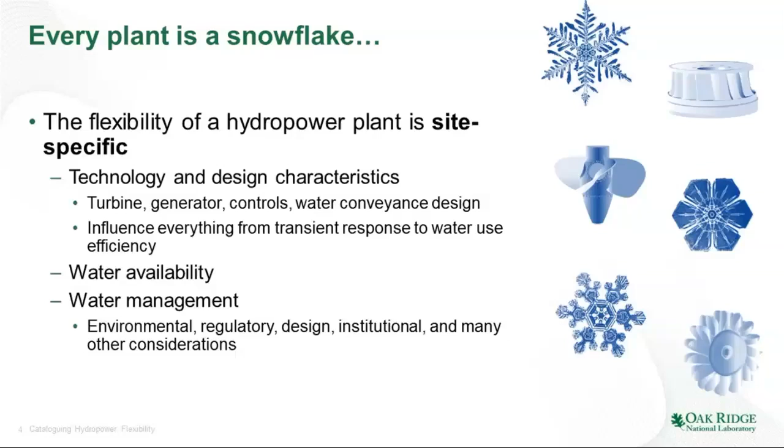And so to talk about that, I want to introduce this concept of timescales as drivers of hydropower flexibility. I've taken a chart here from the Department of Energy's Quadrennial Energy Review from last year. I think there's lots of different charts like this that map out what's happening in the power system at different timescales. But this is a useful starting point, and I've overlaid here at the bottom different types of drivers in a hydropower context.

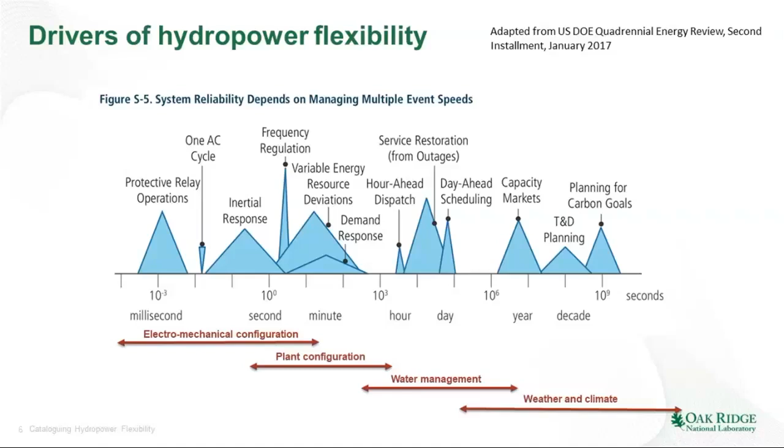And so when you're talking about the things that happen without human control, whether it's response to faults or automated controls, that's completely dependent on how you design machines. When you move out to longer timescales, even within a day, within an hour, that depends on how you configure your plant, and then the real long-term flexibility, how you move energy in large blocks to meet demand and prices and needs comes through water management. Overlaid on that, spanning your daily timescales all the way out to years and decades, is changes in weather and changes in climate. And so it's in this extremely complex and broad space that we have to quantify what we can and understand what we can to help support DOE in executing an impactful R&D strategy.

So, let's see here. First thing I want to highlight is that at a macro scale, it's really water that drives capabilities.

All of these, what you're seeing on the top row here for the different regions of the U.S. is hydropower utilization. We've taken the scale off just so it's relative to that region. The second row is pumped storage utilization relative to that region, and the bottom row is electricity consumption in that region as well. And so at this really bulk scale using monthly aggregated data, we're able to see a couple clear things. One is that when you have power, when you have water as fuel available to generate power with hydropower dams, it doesn't always line up with at least the highest times of electricity consumption.

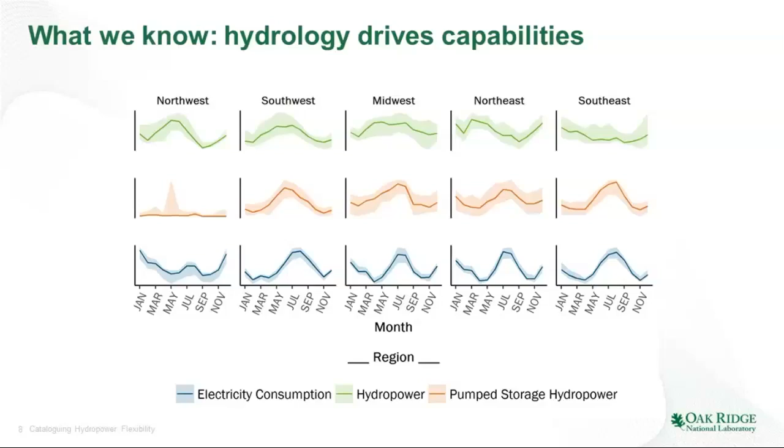And even in the context of those monthly and energy type constraints from water availability, the hydropower fleet in aggregate is quite flexible. On the left-hand side of this slide, I have a chart here from our market report that shows how hydropower, the light blue line towards the bottom, tracks net load within the California ISO. So you have some pump storage plants here, you have lots of small hydro, you have some bigger hydro as well, but in aggregate, the fleet is able to track these net load deviations where you have significant amounts of solar. Everyone's, I think, pretty familiar with the duck curve.

But what's interesting is you sort of see these seasonal variations as well, where if you look in spring, there's a floor of about 2 gigawatt hours on an hourly basis of hydropower minimum that comes in, and that drops during the summer and fall, and you lose some flexibility as well, simply because you have less water and you have competing needs for that water.

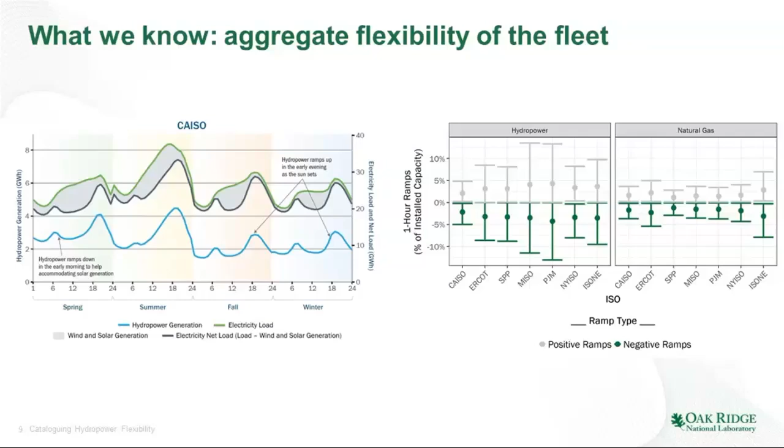But still in aggregate, you can see over on the right-hand side, we have the hourly observed ramping behavior of hydropower compared to in aggregate natural gas for all of the ISOs in the U.S. And you have your medians and your 90th and 10th percentiles here in the chart. But hydropower ramps up more significantly and down more significantly than the gas fleet in aggregate in each of these ISOs. That's partly because you have dispatchability of pump storage, and partly because you still have storage and flexibility capability even within smaller plants and those with other water use constraints.

We're able to observe at national scale differences in operational patterns. The larger your unit is, probably the more valuable it is to the power system, and the more it's used in a situational context. So what you're looking at is for different sizes of units, less than 10 megawatts, 10 to 100, those over 100 megawatts, and then pumped storage units, how often they're started on average in a given year. So our small hydro obviously doesn't start all that much.

I think the typical small hydro plant in the median here is started once every month. They run fairly continuously. As your units get larger, you're talking still that once a month, but there's some that are once a week. By the time you're at your largest units, typically they're starting once a week, which means they're stopping and responding to differing demands on the power system. And then everyone's most flexible resource, pumped storage, starting multiple times per day. And so it's these differential capabilities that are driving flexibility and value in a lot of these markets.

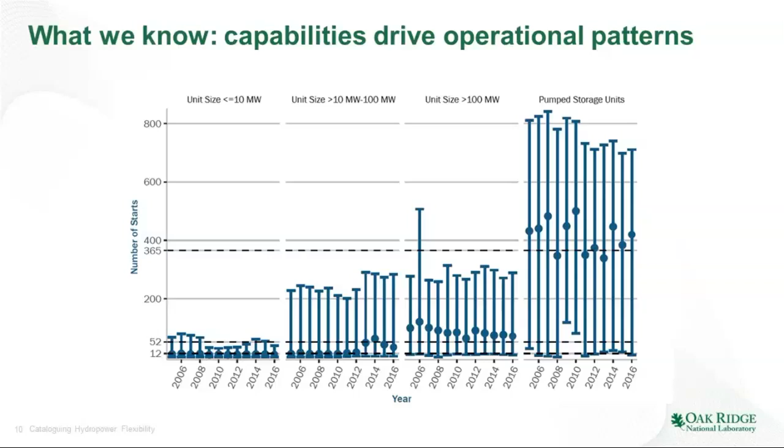And in terms of value itself, we're able to track differences by region, and not surprisingly, for those of you who are familiar with relative electricity prices, a megawatt hour of hydropower is pretty, on average, more valuable than the average megawatt hour in a market.

But even though we talk at length about ancillary services and other values, it's really energy. And when I say energy, I mean the price of natural gas that drives the relative price of hydro. So you see these annual trends in each of the regions, but it correlates very strongly to the price of natural gas, simply because that's what's setting marginal prices, whether it's energy or ancillary services.

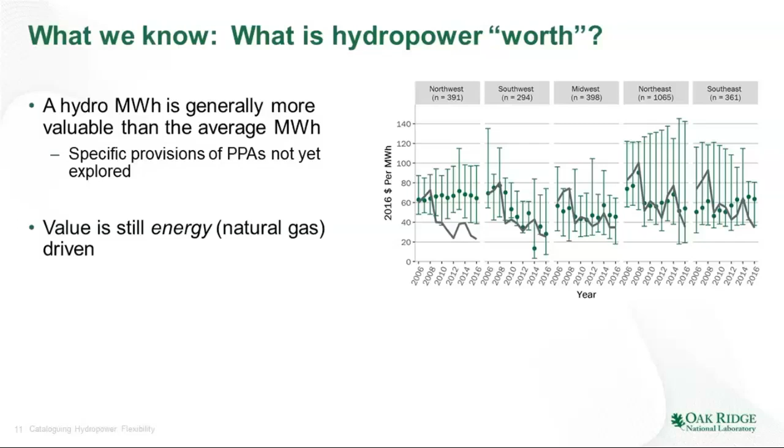But even within all this, we can take little glimpses of the future. As part of our market report, we work with PG&E to take a look in more depth at the Helms Plant.

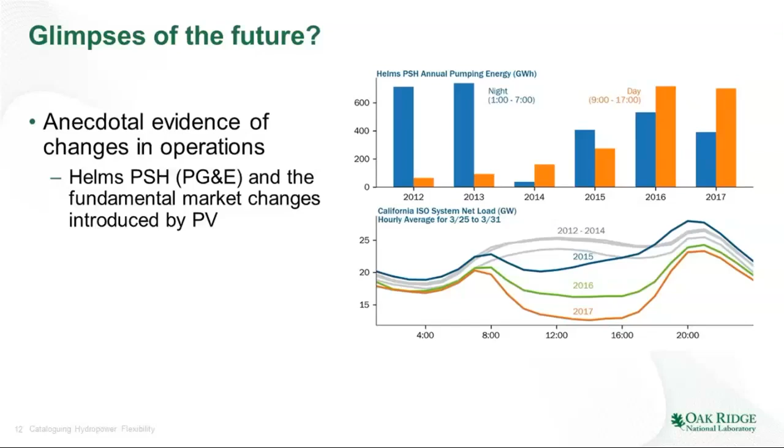Obviously in response to increasing penetrations of solar, you can see in this top chart here that their pump storage plant has increasingly been pumping throughout the day, in a sort of pronounced operational shift from traditional pump storage day-night arbitrage operations. That certainly is a glimpse of, I would even say, the present for PG&E, but as the power system evolves in the rest of the country, we may see similar demands on other projects as well.

Within all of this, we have increasing flexibility, we have our needs for flexibility, and we're also seeing rising costs. I don't want to say that's the cause—that would be the holy grail of identification if we could—but all we do know is that the cost to operate and maintain hydropower of all stripes is increasing at rates in excess of inflation, and the availability of these projects is declining as well.

So as we think about hydropower as an existing source of flexibility, the fact that its costs are increasing and availability is decreasing is probably not a good thing at all, and begs for solutions.

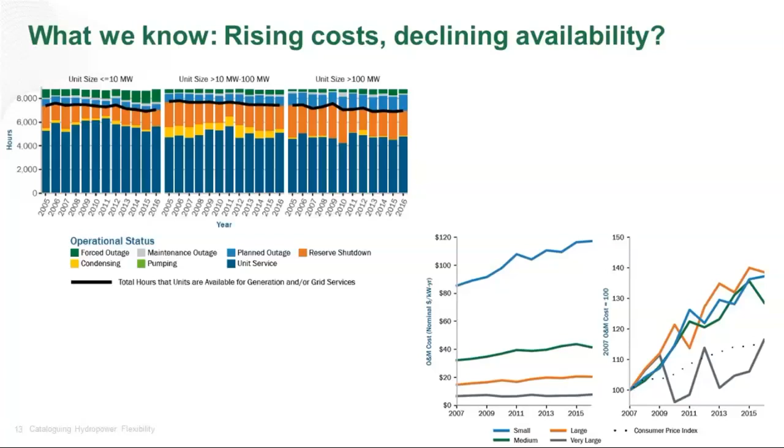So I think what you've noticed is that we talk a lot about flexibility, but what you've seen out of the market report is at a highly aggregated scale. And so when we do national analyses like this, we have limited visibility into the rest of what's happening in the power system, some of the key technical capabilities of hydropower, and what we're really only seeing is the influence in the aggregate of certain water management practices and the weather and climate aspects.

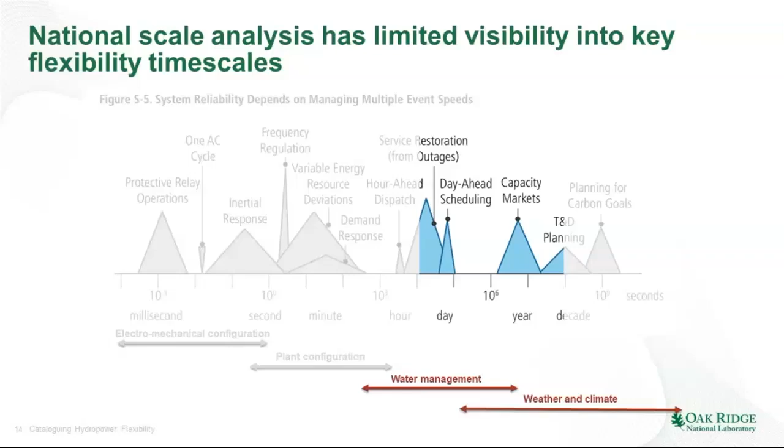Even then, that's kind of generous. We can do what we can at national scale, we can do what we can when aggregating through time and across spatial scales, but to make better informed decisions, we really need better data.

And so that was the motivation here for DOE's new Hydropower Value Study project—can we do better to inform the R&D agenda, not just to track industry trends, but can we actually learn things about operations, learn things about plant configurations that allows DOE to make informed investments.

This is a multi-lab effort led by PNNL, a colleague of Nathalie and myself, Abhishek Somani, is leading that project. And it's, just broadly, can we learn from case studies, and can we do more detailed, more focused data collection to answer these questions?

The project itself is split up into 3 different core tasks. The first is a landscape analysis. This is, in general, a more granular look about how hydropower is being operated across the country, why it operates the way it does, how it's valued, and there's a really interesting component of this. I'm not going to talk about it here, but if you want to know more, follow up.

On how do you look at the value and can you monetize the value of certain streams that we hear from hydropower owners—at least they're providing, but they're not being compensated for. And so inertia is the primary focus there.

Building from where hydropower is and is operated today, we're looking at future value drivers as well. That's how the power system evolves, what possible paths are there, and what sort of demands and what sort of value is going to be placed on flexibility for hydropower in the future.

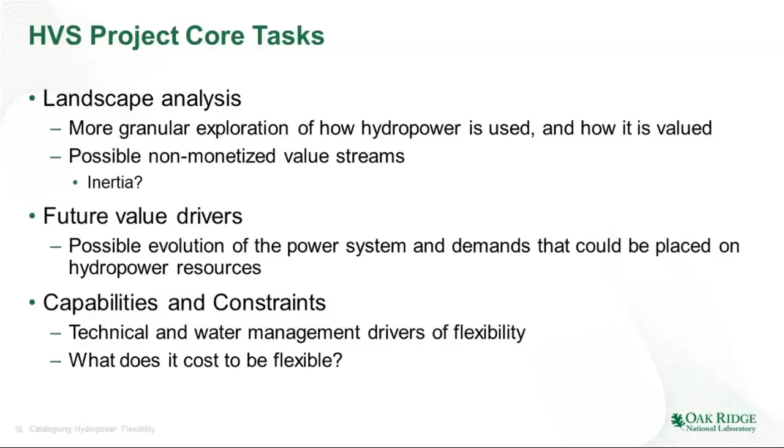Can we drill down within a project, within a unit, and identify specific types of configurations that increase or decrease flexibility? At that point, you can start making decisions about whether you can, at a cost, become more flexible, and can we quantify that? I'll give you a few examples from this capabilities and constraints piece, but hydropower is its own challenge.

So we're working from plant and unit scale databases. These are organizations and types of information we are involved with utilities for and other contexts. There's electric utility cost group data stored in HydroAMP, and other centralized sources. Where it doesn't exist, we can try and make inferences, but we're still swimming uphill trying to identify each and every one of these snowflakes to the extent we can.

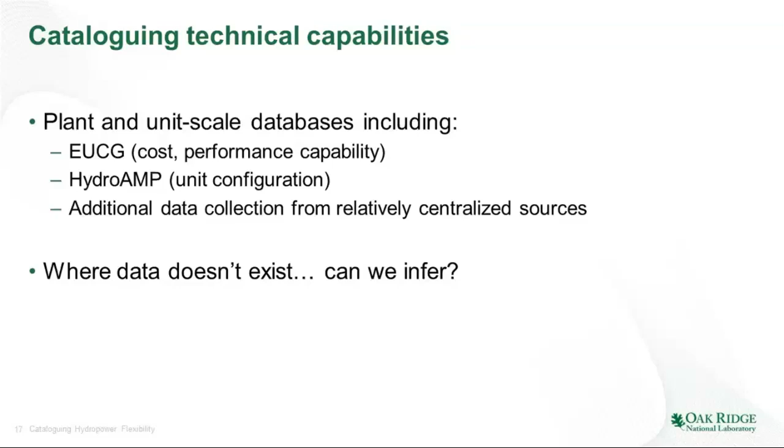So just some observations from what we found. To the extent we can quantify flexibility in the fleet, on the left-hand side I'm presenting data that comes out of the Energy Information Administration's new requirements in their standard data forms, showing that the vast majority of hydropower, over 80%, can cold start in less than 10 minutes. And when you think about that, it means it's ramping even faster. These are, I'll call them, conventional resources - very, very fast and flexible - and the vast majority of the remaining 20% starts within an hour due to various technical and plant constraints.

But different types of units are used very differently. There's different value drivers and different capabilities. In this right-hand chart, I'm presenting data from one of our utility partners, so it's obviously blinded here, but what you're seeing in terms of the height of these bars is the amount a unit moves on average within a day. I'll use this pump storage bar as an example.

This is a 100 megawatt unit. The scale you're looking at here is the number of megawatts it moves up and down in a day, in absolute terms. This pump storage plant is extremely flexible, and if it was starting and pumping once a day and stopped, that would be 2 times its capacity. But instead you're seeing nearly 50. These are units that are coming on and off, following load and incurring the associated wear and tear.

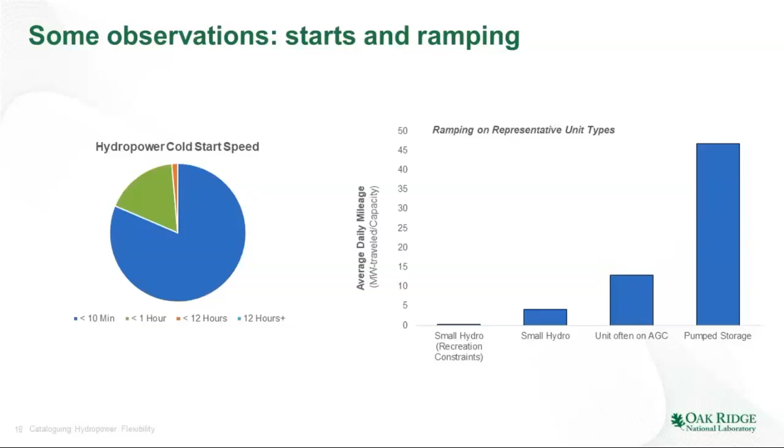Some other things we found by digging more deeply into how individual unit, plant, and site characteristics influence flexibility and capabilities for flexibility - on the right-hand side here is a succinct illustration that different types of hydropower, different configurations, different site characteristics, in this case, have fundamentally different inertia characteristics. What you're seeing is these blue X's are propeller type units - if you're familiar with hydropower, these are Kaplans or fixed blades - and your green units are Francis types.

The propeller types are lower head, so you have less pressure differential. That means for a given capacity here on the x-axis, you're going to have a bigger, heavier unit, and that unit's just going to have more inertia by the nature of its design. The characteristics of the fleet here, as an illustration, are going to have a profound amount of influence on how hydropower in aggregate is able to respond to a changing grid.

In addition to direct inertia, there are stability characteristics that also vary. Often when we're looking at new hydropower, we often think pump storage, and then there's decisions to be made there whether you have a fixed pump or a variable speed pump. Those come with certain technical capability trade-offs. Your fixed speed pump is going to be synchronous - it's going to have inertia, and if that's valuable in the system, you would almost prefer that.

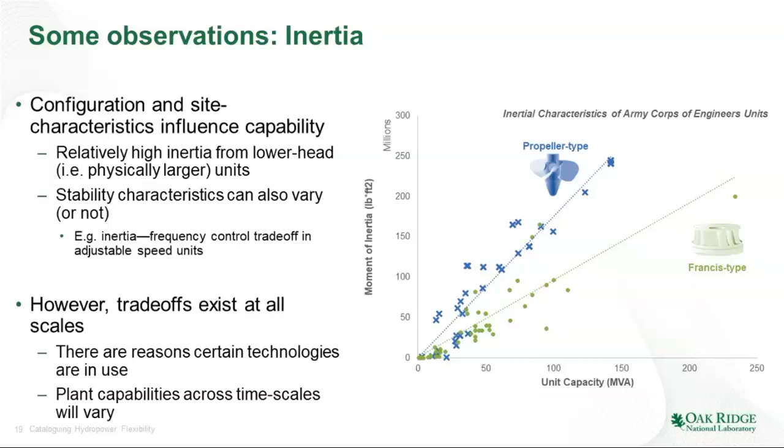But even beyond how you put a machine together, you have capabilities that vary across all time scales simply from how you manage water and what the other demands are on a project.

In general, that leaves us at a place where we have lots of information, we have lots of stories to tell, but we need to tie it together in a way that provides really good insight. I'd be curious to hear from you all if you have questions on what sort of things you'd like to know about the hydropower fleet and how we can communicate those.

In general, we need better information at the unit level. We were able to collect a lot of that, but at the plant level and certainly in water management, it's hard to look consistently across the fleet. There's even sort of an existential question of can you catalog in a coherent way water management practices for 2,000 hydropower plants?

In the absence of the capability to do that, though, case studies are really useful. We can take these complex interrelationships between equipment design, plant design, hydrology, and institutions and put them in context. So I'm going to turn over the presentation now to Nathalie to discuss how hydrological constraints influence flexibility, and she'll talk through that in concept and then give us some results from one of our case studies.

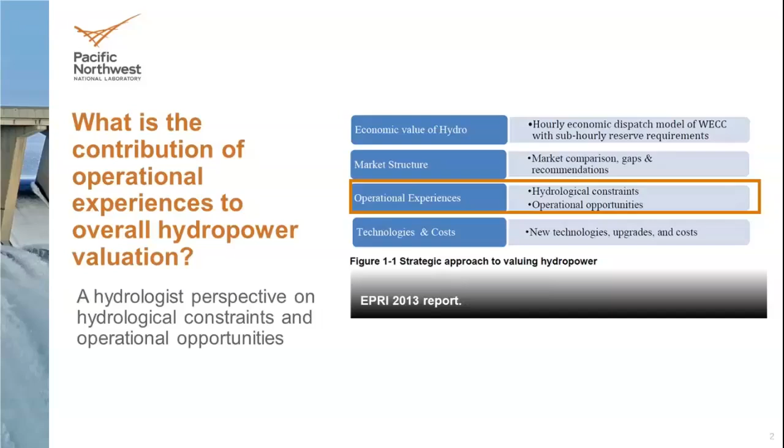The actual question we try to address is what is the contribution of operational experience to overall hydropower valuation? The way to value hydropower, we have multiple tasks to do this, and leveraging the EPRI report, there is the economic value, the market structure, the technology and cost, and here really following on this operational experience, like Patrick said, there are a couple of different snowflakes, and we want to understand how those snowflakes evolve. From a hydrologist perspective, it means that I'm looking at very different scales. So to give that hydrology perspective, I'm going to start back from a very large scale.

Just as a spoiler, there are fuel-specific opportunities, but they are being tuned up by flexibility requests from the power system.

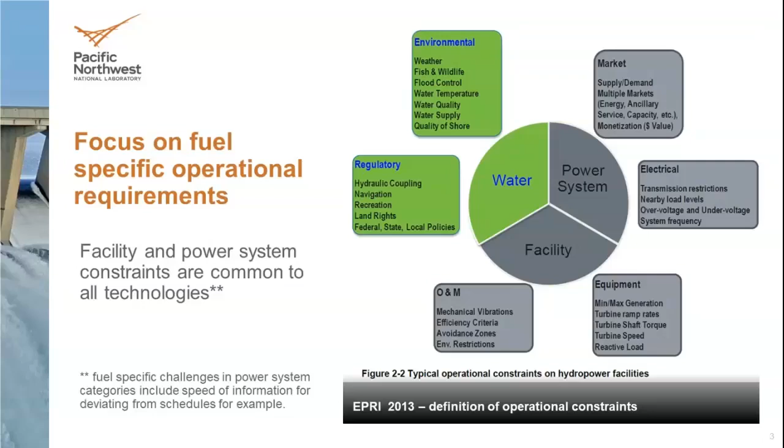What it means with respect to that fuel's characteristics is that water is free, it comes at no cost, and the transport by itself is also free. It's provided by the river system. And there is a huge storage that is also very economic because it's provided by snowpack and also by the storage within the river itself.

The capability that it provides is that, sure, it's variable. There is more or less precipitation depending on the seasons. Sometimes that's snowpack, and precipitation is not the same every year, so you have an interannual variability. Some people see that variability as a constraint, and I'm going to demonstrate how it's actually an opportunity.

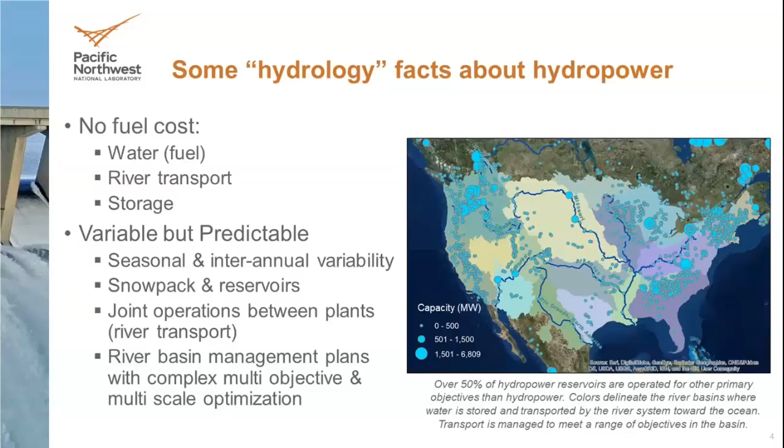What that provides as well is insight on what the operation will be and when the fuel is going to be available. I wanted to provide this so we can make the contrast with other technologies, in particular thermoelectric capacity. So how is hydropower used over the entire U.S.?

What we're going to look at is how each region is harnessing the hydrology and hydropower.

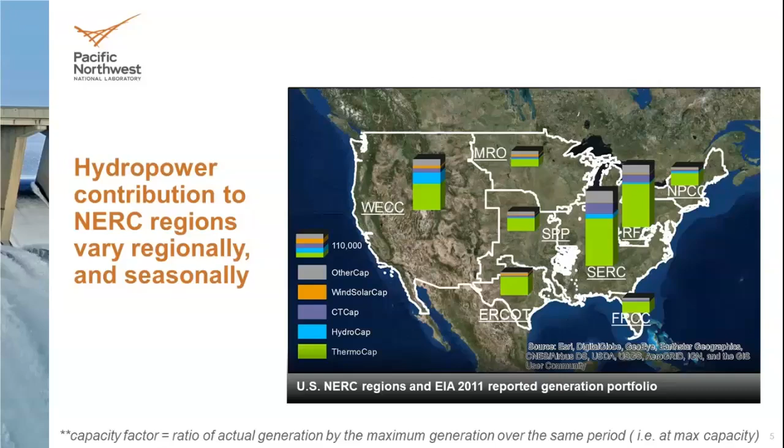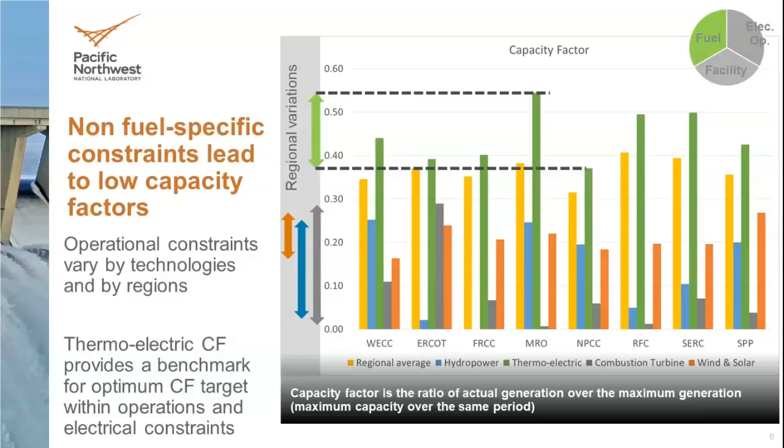That's the assumption for this presentation. That helps us quantify those hydrology constraints and opportunities.

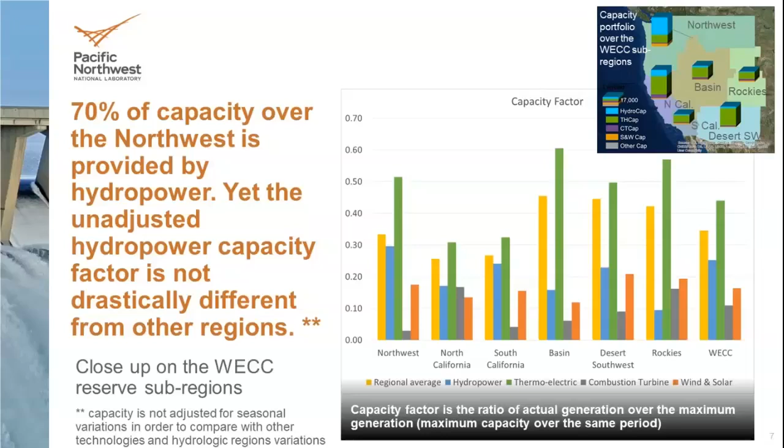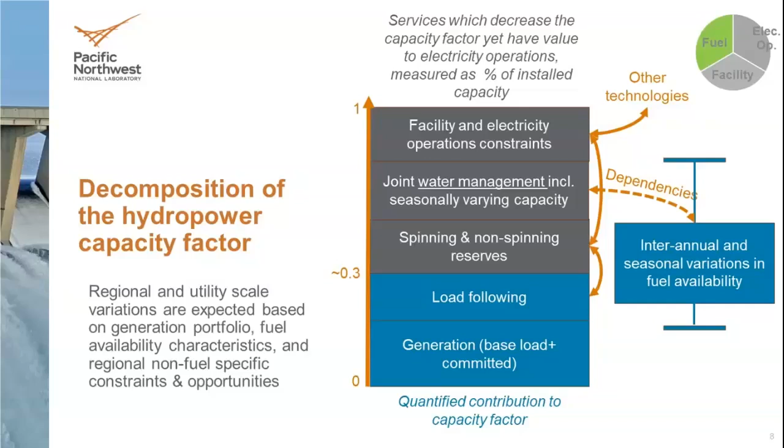What I'd like to demonstrate here is the role and contribution of interannual and seasonal variation in fuel availability. By fuel availability, I'm also including everything included in water management. Coming back to the Northwest, over the Pacific Northwest, combined seasonal and interannual variability in hydrologic conditions lead to large variations in hydropower capacity factor. We know it - question is how much?

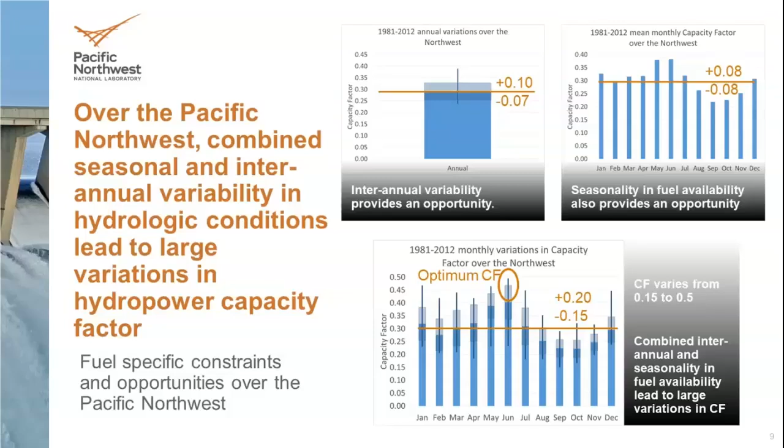The last point to show is that in terms of predictability, you really need to combine both the interannual variability and seasonality to understand how the capacity factor is impacted. When you compound the two events, seasonality and interannual variability, the variation in capacity factor goes to +20% to -15%. That is the variation that sometimes is seen as a challenge for coordinating power systems. And strangely, when you look at long-term planning, sometimes this variability is not well represented. I'm making this remark because it's going to impact how we value and understand hydrology constraints on hydropower.

So this was at the Northwest scale. The value of hydropower and how hydrology is impacting hydropower operations varies across scale. So I want to do a deep dive on a case study, which is the Chelan PUD. Chelan is located over the Northwest and consists of a storage project on a tributary of the Columbia River, and has two runs of the river that are downstream of Grand Coulee, and a set of very large storage projects in the US and Canada.

So the inflow into those projects is extremely regulated. It's hydropower only, and like many hydropower utilities, services are marketed for the entire project. That's important to know because water management can be pretty complex and is usually reserved for the river operators, and then they market the services as a whole to the grid. It means that water managers also ensure coordination between the plants for water management purposes and for the grid purpose as well.

On the right, you have the outflow from Rocky Reach for 3 years: a dry year, an average year, and a wet year. As you can see, the turquoise is the flow that's going to the turbine, and in salmon orange is what goes through the spill. The spill is necessary for downstream benefits such as flood control, water quality, and simply for dam safety. It's limited by storage. Across the entire US, only a couple of reservoirs can store the annual flow and have a perfect, very flat flow throughout the year.

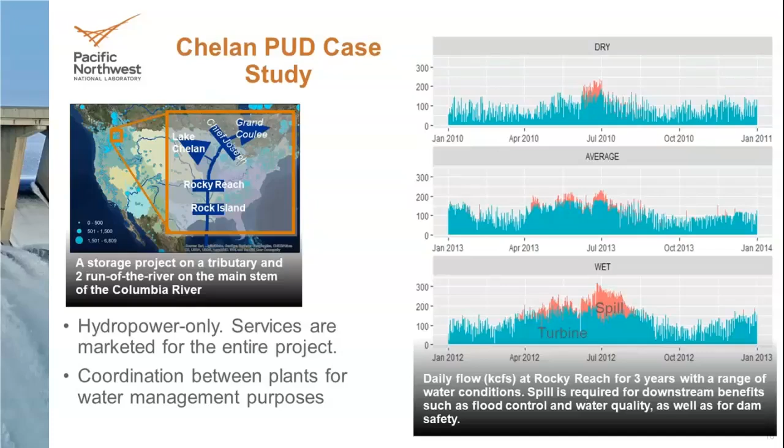Most reservoirs can only store about a couple months worth of flow. So the predictability of the fuel is about three months, and it varies from one dam to another. That's why there is some spill that is being handled by water management. And you can see that interannual variability is affecting that spill more than what goes through the turbine.

When you look at how operations are impacted, here we're looking at the capacity factor again for the entire Chelan project, for two periods: high flow and low flow. During the high flow period, this is when spills are occurring, and in blue there is the generation, and the capacity factor is much higher because it's a run-of-the-river reservoir.

So we're talking about a capacity factor of 75%. Even with high flow, there is a reserve that is not contributing to the capacity factor, which is about 15%, and this is sustained throughout the hours of the day. If you look at the maximum operational capacity and minimum generation, this is the flexibility that can be provided by the plant. There could be any change in operation within that range. We need to define for how long, but this flexibility is available. Given the power system requirements in the market, it's being used here as something pretty constant throughout the day.

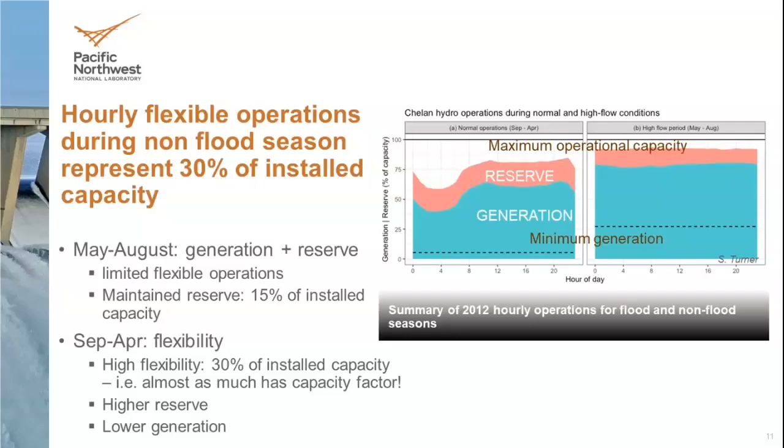I want to mention as well that because it's a low flow condition, it can be seen as a constraint that is also offering the flexibility in reserve and flexible generation. So here hydrology and the water management infrastructure is providing that service.

Coming back to our capacity factor, I think we're demonstrating that the high capacity factor in May, when generation is highest, is also because power system requirements on reserve are actually lower—so it's really increasing that capacity factor. However, when the flow is lowest in September and October, it can be seen as a constraint because the water isn't there, but actually it's a combination with power system operational requirements that require much more reserve at that time. So we need to find the right measure to represent the actual flexibility of the system, and the capacity factor here is really showing the compounded effects of water availability and power system requirements.

Another metric I'm showing here on the right is the CDF of absolute ramping as percent of the installed capacity. Each line is for a different month—gray for the high flow month, red for the low flow month. Those little arrows are deviations in installed capacity. The frequency of operations that are within plus or minus 10% of installed capacity represents 80% of the operations during low flow conditions.

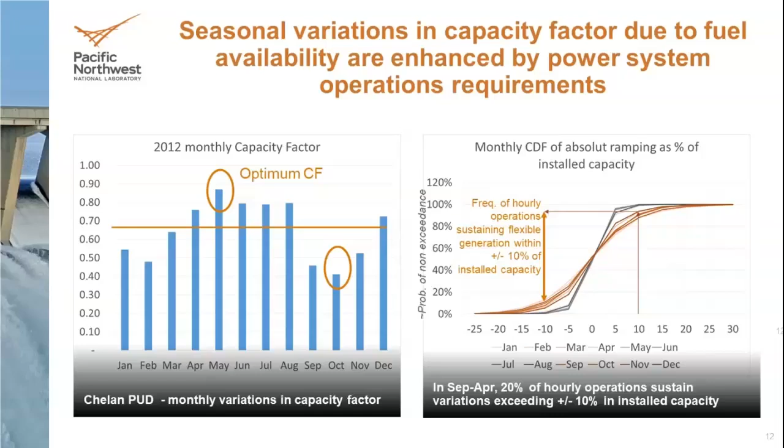It means that during low flow conditions, over that case study, 20% of the operations sustain variations in generation exceeding plus or minus 10% of installed capacity, which is very large. And you can see during the gray colors during summer how it's being used with less flexibility. So that's a measure of how it's presently being used.

So with this, I would like to cover two slides: one on conclusions and one on next steps. I'd like to conclude first that variations in fuel availability impact the hydropower capacity factor and provide flexibility to the power system. We've also seen that non-fuel specific requirement constraints, such as power system and facility constraints, affect that capacity factor tremendously.

In our case study in particular, we show that reserve services are being maintained to meet power system requirements, and they also provide very flexible operations. We show that those flexible operations were affecting the capacity factor—they were of the same range as the capacity factors. We had a variation in installed capacity that was the same range as the capacity factor.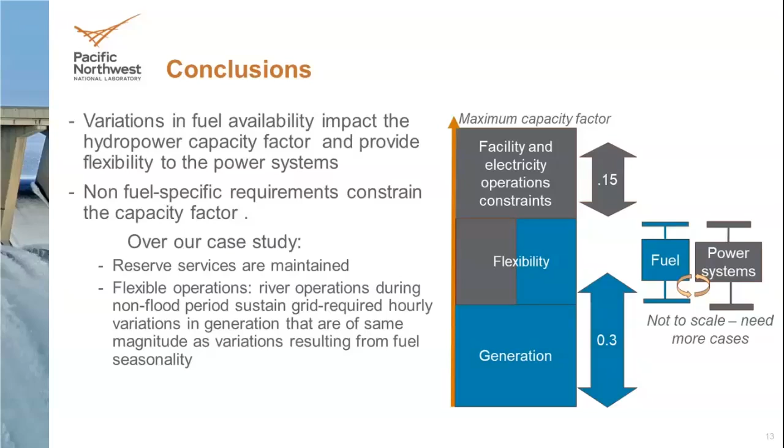This case study is specific because these are run of the river. As a next step, we are working on other case studies, and this webinar might be the right opportunity to ask if other utilities might be interested in sharing their data so we can look at hydropower operations the way we've presented here. There are other services, such as inertia, affected by hydropower availability because they're functions of how many units are online. This isn't what we presented today, but it's something we're considering for our analysis.

What we want to understand is how river operations support other technology and markets. Here we isolated how much hydropower is affecting the capacity factors, but there is interdependency. Looking at this pie, it's not just fuel-specific — power system requirements are not the same for all fuels. They actually differ, and if we want to value hydropower, we need to understand those dependencies.

In particular, river operations support electrothermal technology through stream temperature, which affects capacity factor. Same thing for supporting the integration of renewables. We're also looking at the energy imbalance market, which tends to decouple from water management. This may affect our measures, and we'd like feedback on the measures we're using. Finally, this leads to the representation of hydropower in power system models and scheduling.

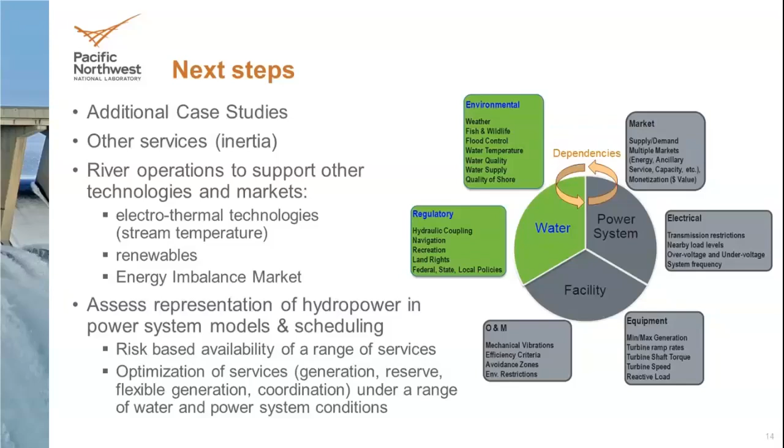We've had one question come in, and it's a good question about the future growth of the industry, noting that hydro capacity has been fairly flat for the last 10 years or more. What do you see as far as the growth of the industry is concerned? What's the opportunity for increased installation of this very flexible capacity? And what are the main challenges to expanding hydro capacity? Patrick, Nathalie, do you want to take a crack at that?

Yeah, I can take a crack at it. We looked at this in some detail in a 2016 study called the Hydropower Vision, a long-term planning type exercise. I think what you're going to see steadily through time is that the vast majority of our large existing hydro is here to stay, and it's getting optimized, refined, and upgraded through time. So you'll see incremental capacity additions, and incremental improvements in water optimization and water management technology that free up a little bit of that flexibility.